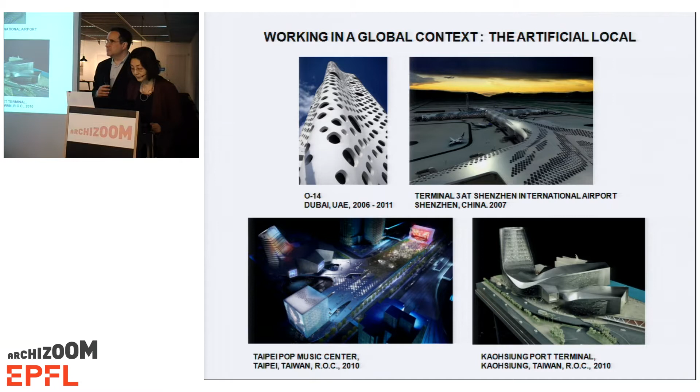Okay, I'll be talking about the first project, the O14 project, which was completed a little over a year ago. One of the things that pulls together the projects we're going to be talking about this evening, aside from at least 2 of them being competition projects, is the question of context in contemporary work. For better or worse, these projects deal with places that are quite remote from our office in New York, and therefore we're not talking about the normative or perhaps old-fashioned form of locality, but about another kind of emerging form, which I would say operates on a number of levels.

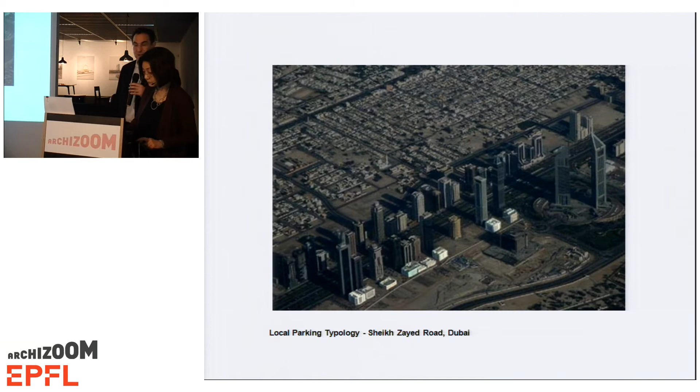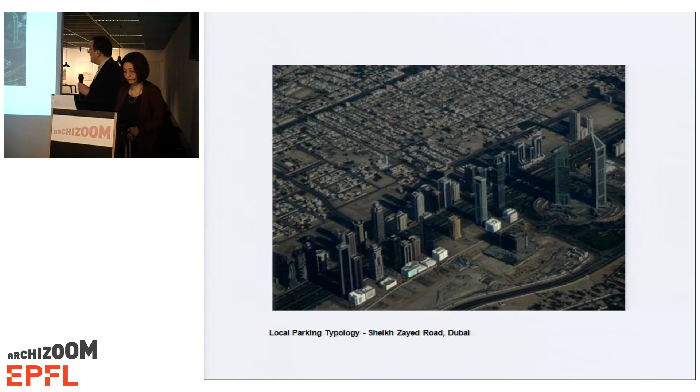The other aspect of this kind of urbanism was the almost delivery-package notion of tower and associated buildings like parking structures. This image of Sheikh Zayed Road, the central road in Dubai, shows a typical deployment of tower on the street frontage, in any kind of sub-postmodern style, while the back street would have a typical parking structure occupying the whole back area, making a dead street behind the main drag. That was the kind of norm developers and builders expected.

Then, of course, we were handed the design guidelines by Business Bay Development, generated by a British firm called Halcrow, a big multinational conglomerate, enforcing a kind of postmodern aesthetic on the development. They tried to mandate arcades at the base, some form of a middle, and a decorated top, suggesting how parking would be associated with the building.

So we worked very hard with the developer to rethink those guidelines. We had to work within them at one level, but also cleverly subvert them. The first question was the podium base. Instead of seeing it as a base, we looked toward more modernist antecedents—that base could actually be super-elevated, raised above the ground plane, opening up the ground plane and making available another kind of urban space at the top of the podium.

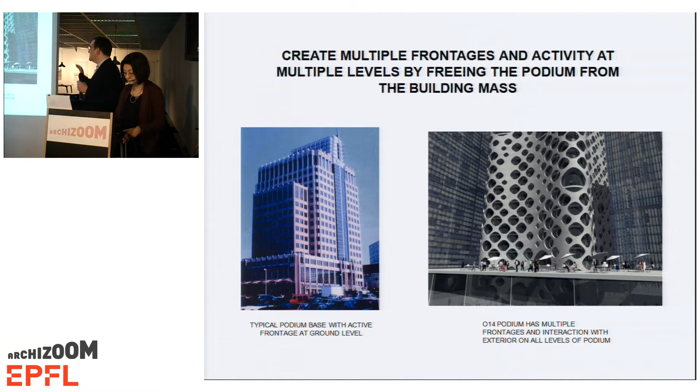This was something that for a short time was being developed by OMA for the master plan too. It was a short-lived association, but we thought it was a fantastic idea—you could have an active ground plane, and these mandated podia could be connected, developing another strata of life in the city. It's still there in the project, although sadly the other buildings basically wall it off. But it's part of the ideological dimension of the project, I'd say.

The idea of the arcade also had to be rethought. Our notion was not to make it an applied base, but to essentially provide the space for the arcade. It wouldn't be signaled by a base, but by a clearing away from the lobby space—one could enter it, but there wouldn't be a classical stratification of the tower like you'd find in a traditional arcade, yet it would still function as such.

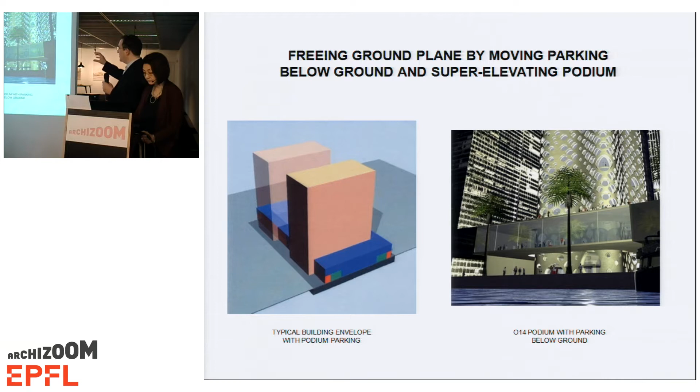And again, in super-elevating the base, we argued successfully with the developer that we could eliminate the parking typically placed there. Because it's on the water's edge, they could make a lot more money with commercial space or developed spaces inside that super-elevated podium rather than filling it with cars. So we successfully argued for below-ground parking in this scenario as well.

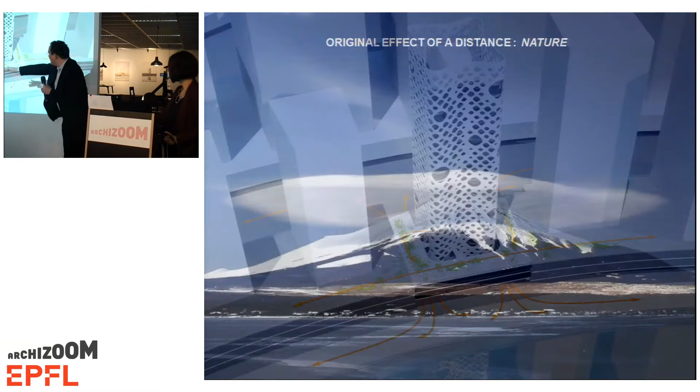So essentially, we're trying to open up both the ground plane—this is a waterfront esplanade—and make available this second level of inhabitation, which could theoretically be connected.

The other part of the project I want to open up here is what we're attempting to do with the effect of the architecture, which I mentioned obliquely earlier. I go back to some writings, specifically a work by Walter Benjamin that I'm sure you all know, called The Work of Art in the Age of Mechanical Reproduction. I was struck rereading it when he talked about...

...what the original notion of a place was—like a mountain, which he gave as an example—producing the effect of distance when you look at it. Original kinds of places not susceptible to reproduction produce a strange kind of effect, which he calls that of a distance. And I began to realize that those potentials typically associated with natural objects are suddenly possible to play around with in architecture now, given the new tools we have available.

We can produce a kind of second nature, I'd say, in terms of the appearance of the building, which produces an uncanny effect between the artificial and the natural. That's also a question of how one uses things like gradient fields in design, continuous variation, and so forth. You get these strange effects, which I'd say are more a question of management than of composition.

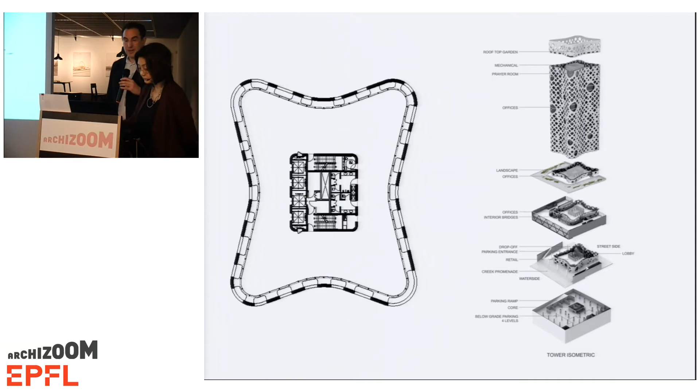So I'll advance now into the building. Quite simple—it's a 22-story project. There's an exoskeleton of concrete which does all of the vertical support and takes care as well of most of the lateral forces on the tower. Because this is a concrete exoskeleton, like a nuclear reactor shell, the core could actually be fairly lightweight, since almost all of the lateral forces were taken by this exoskeleton.

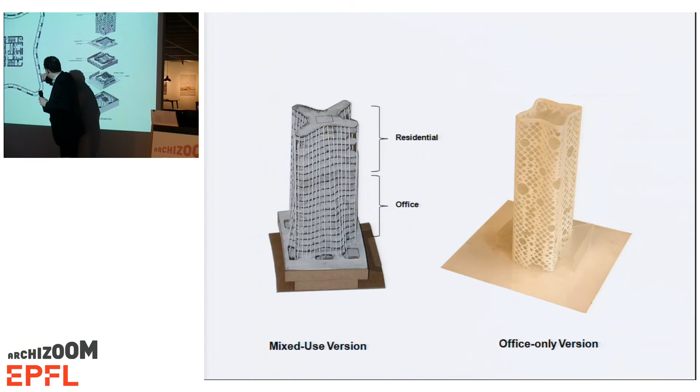And that exoskeleton is about one meter away from the slab edge. So there's a glazing line here, and what we call the tongues, which then connect to the shell. So there's a void space. The meter was based on a purely pragmatic consideration—that's enough space for a window washer to get in behind the shell to clean the glass.

And then there was also a measure of economy, because we didn't have to deal with the problematics of putting glazing into the holes, but could use a fairly standard window wall that would span from slab top to slab bottom. So it solved a number of problems, both technical and in terms of crafting this project, by separating the glazing. But there was an earlier set of iterations that were far more conventional, which I should just touch on.

Everything moved so quickly in Dubai in terms of the demands of the developer that the first iteration of the tower actually mixed residential and office. The working notion in this very early, more morphic model was to do a conventional column and slab structure with an applied curtain wall. The cruciform shape at the top would handle the residential, in this case a series of duplex apartments, and then the project would belly out and widen to accommodate the office space.

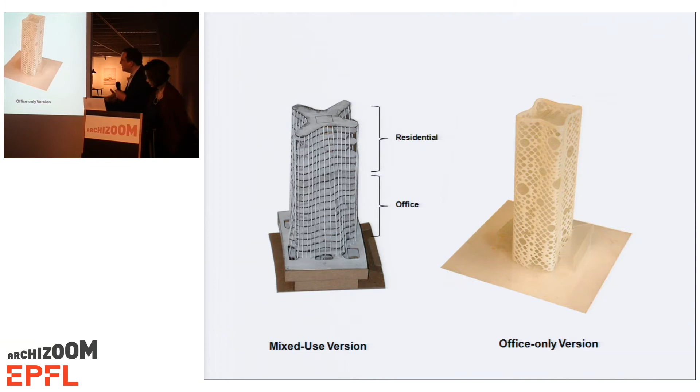In the event, it became all office space, and we had a kind of crisis in terms of the direction the design was taking, and then shifted to a completely different model, which was the exoskeleton project.

This sort of project is really an anti-frame model. There's a moment in a really wonderful essay by Colin Rowe called Chicago Frame, where he departs from the frame model and starts talking about this peculiar, really great project by Frank Lloyd Wright, called the St. Mark's Tower. Retrospectively, our project probably belongs more to this lineage.

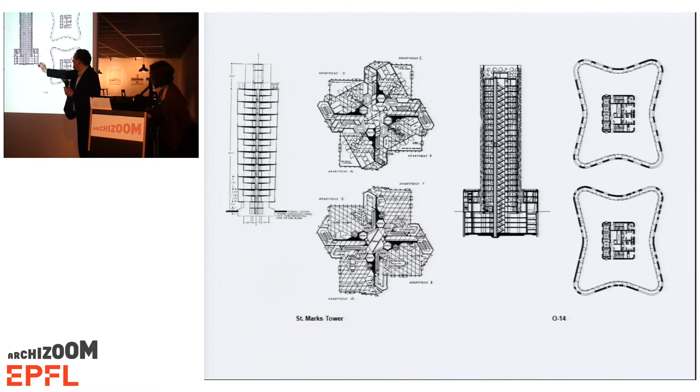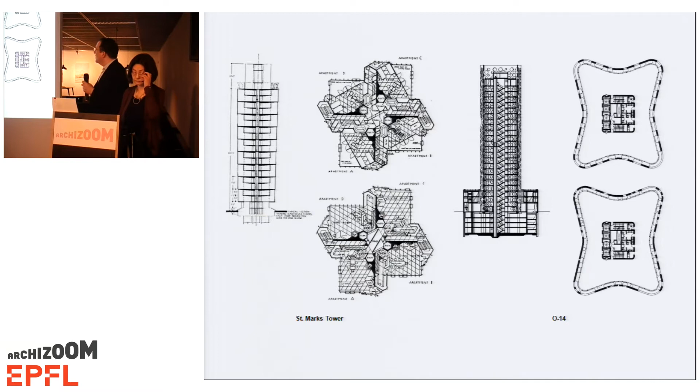In this case, the tree form of this project concentrates the structure towards the center, and then you get branching trays that come out of this central tree. In our case, it's almost the inverse — that tree has expanded to become the periphery, and then the slabs hang in and connect to the central core. But I think it belongs to that kind of lineage, away from the frame model and the older 19th century derivatives, or even the new versions of frame that you see in Dubai.

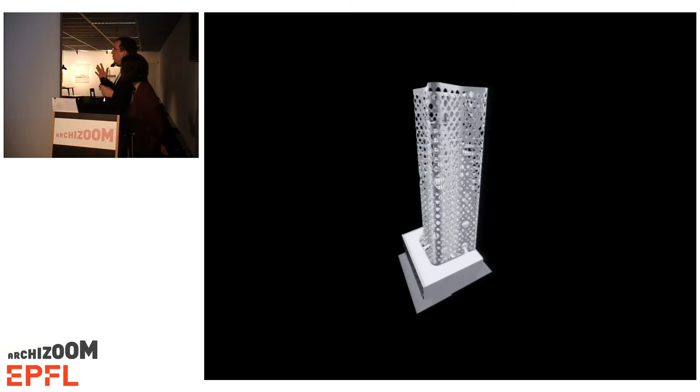So this notionally is what happened in the project: it starts with a column field, core, facade. That idea got pulled to the outside, and then the envelope becomes pockmarked with holes, which provide about 40% openness, more or less the same as one would find in the normative building, but with a very different distribution.

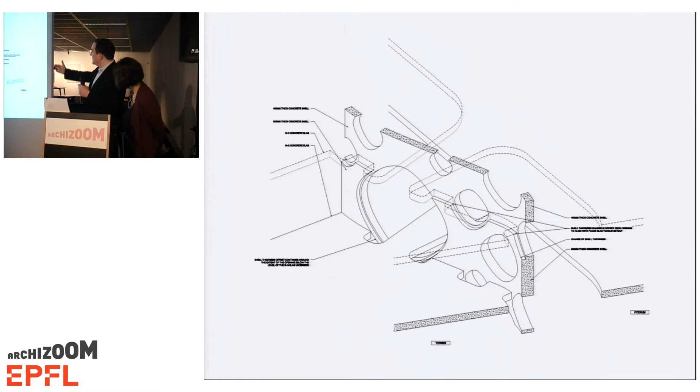As we developed the project, there was of course the necessity of how we would make connections from this podium structure, which was a two-story structure down below, in and through the tower. So we devised a series of bridges that connect to the podium, go through the holes, and then connect to the inner parts of the slab — but actually two separate buildings, structurally distinct.

The other thing that was really interesting at that moment in the project was that we went from a shell that tapered continuously to a hard change of scale of the shell. It went from 60 centimeters down at that podium level to 40. So we got an interesting detail in the holes in that transition zone.

Do you want to go back a second? So I would want to be honest about this. The next — yeah.

As a consequence of that separation, our mechanical engineer told us early on that we would be able to have a real benefit in terms of shading and cooling of the building. Of course, we knew that the shading would be highly effective, but we weren't aware until he pointed it out that you would get a chimney effect in that gap that would substantially lower the cooling costs of the building. Once we found that out, we worked to optimize that potential within the design.

That leads to a larger question about the issue of sustainability in relation to design, which has really been troubling me. It's very much on the minds of American architects. I'm not sure how it's being played in Switzerland, but I came to realize that if you're dealing with a body like LEED in America, where you have to meet certain numerical performance standards, and you look at the architecture that's actually winning these LEED awards, they're practically indifferent to the architectural expression.

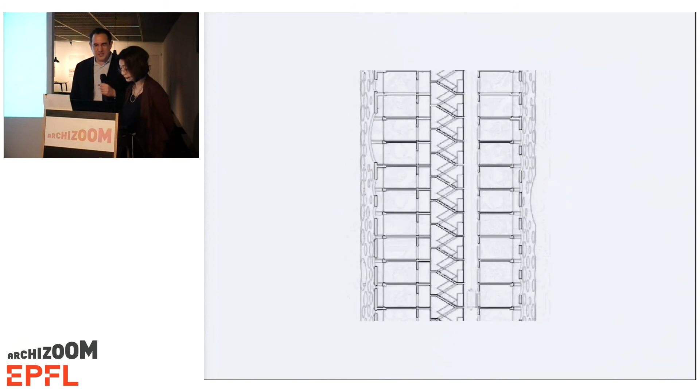And I'd also want to begin to talk about the specific aims behind the expression and the aesthetic of the building in relation to that idea of the artificial natural.

We realized that as the project developed, it got volumetrically relatively simple—just an extruded, kind of soft cruciform. I remember seeing these kinds of monolithic structures, like the Pyramid of Cestius in Rome, where you really don't have a clear idea of how big that monolithic form is, especially if the day is misty. It could look enormously huge, and then when you get up close to it, you realize it isn't all that big at all. That was a really interesting potential for the project, to deal with the monolithic.

And then on the other side, to deal with something that was highly figured, having excessive features like this toad, which basically has a kind of disruptive camouflage pattern on it.

So in thinking through the use of the diagrid, one of the things we were playing around with was trying not to be able to read the floor heights clearly. On the left is the more typical correlation between the crossing points of the diagrid and the floor slabs, where you'd get equally spaced connections. We deliberately scrambled that, making those patterns very much out of phase. A whole series of consequences flowed from that move, one of which is that it becomes very hard to read how tall the building is. You also get very asymmetrical connections to the outside, because the slabs connect to wherever they're solid.

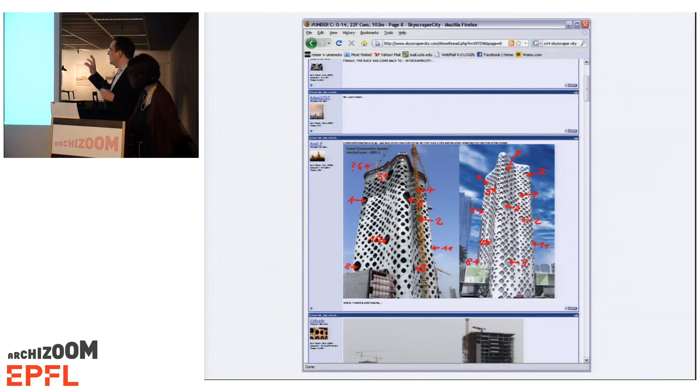So a very different kind of spatial effect when you go under and in between that skin, because it's possible to look up and see it. This was a kind of proof of concept—there are bloggers trying to correlate holes described in the early renderings and heights to ones that were in the actual building and construction.

We were again, through the iterative process, really trying to find a way of not reinforcing the load paths visually in the project, but to create a series of discontinuous zones of solid that would finally trickle down to what is actually a very regular column grid in the structure below. More or less the spacing of these solids, when this surface is peeled around, correlates to the regular grids in the parking structures. But we'd find a very devious way to bring the loads down in the pattern. This is an unfolded view of the geometry from the inside, and those horizontal dashes are connections to slab.

So there's an effect as a consequence of this move to irregularity. Contrasting this with a typical facade on 6th Avenue in Manhattan, where you have very clear perspectival diminution, which reflects back on the subject as a kind of sole owner of that view, versus the variable perspectives—the contractions and expansions produce a number of almost competing energies on the surface of the building when you look at it obliquely.

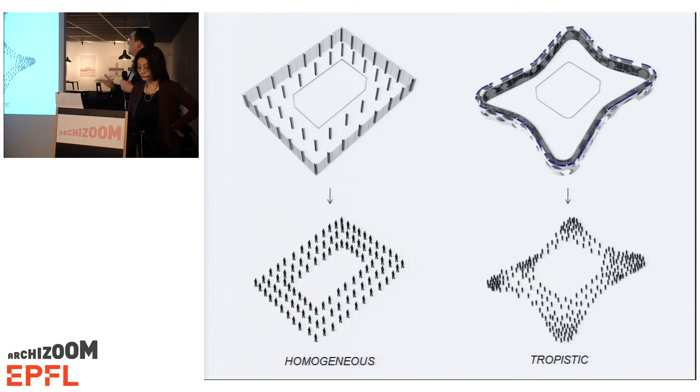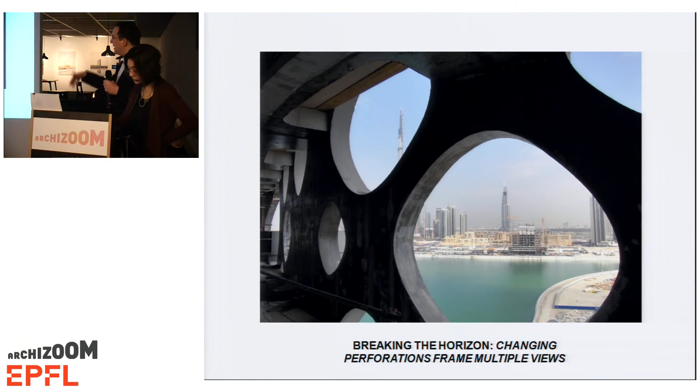That would be further enhanced by dealing with a non-uniform envelope rather than one that ordains the same homogeneous wrapper all the way around. So you get very strange and interesting views out, ones that, because the shell is some distance away from the edge of the wall, allow one to look up and down obliquely, as well as in the scan you'd find in the normative office building—a very different experience of the context optically.

And then pulling out, there was also a very interesting phenomena, which isn't just related to our project, but I think is part and parcel of the use of computation these days, where people are already pointing out that it's very hard to distinguish the renderings of a project from the built project.

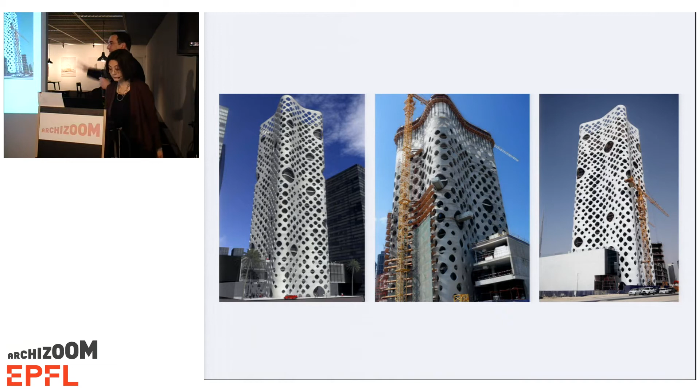And that was certainly true in the development of O-14, where you get the most material expression during construction. Once the building was finished, for a certain number of months, there was this incredible ideality of the surface, almost looking like the rendering. Now it's in the third phase with all of the aging and the desert dust, and it's starting to look more like a strange desert plant. But it's a very interesting kind of evolution, I would say.

It's an impersonal one. The other thing we began to explore in the genesis of the building was the issue of its materiality and its relationship to the geometry. On the left is an analysis done by Princeton students and the engineer Guy Nordenson for the Tall Building Show at the Museum of Modern Art, of the World Trade Center, the one that went down in 2001, by the engineer Les Robertson. He used something like 15 different alloys of steel strength.

In order, the color coding basically charts that. But in order to keep the facade totally regular, there were different force zones and then different strengths in order to maintain homogeneity. We realized that we were on the other end of the spectrum in regards to this. So what we were exploring really was an assumed extreme redundancy of structure, which gave us a lot of flexibility.

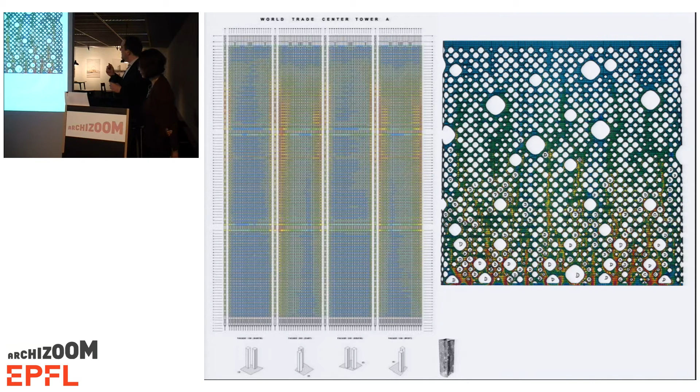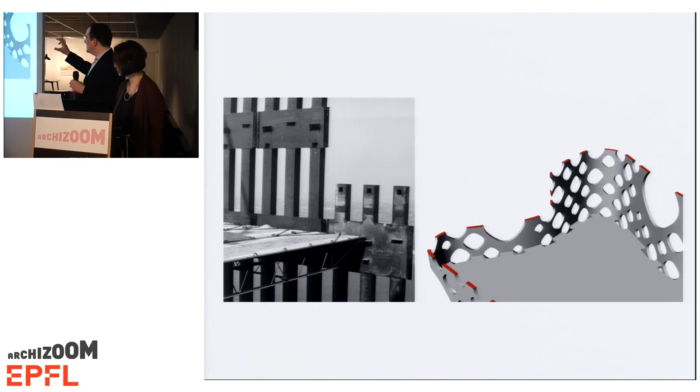So we went for the highest strength concrete and the reinforcements such that we could really gain a lot of flexibility in the way we could modulate the size of holes and their position. I think they're part of a connected spectrum. It's not totally different, but it's a different way of thinking through those relationships. So these are both tube structures, more or less, World Trade and ours. But one is quite regularized, and ours deals with regularity related to the irregular.

So I'm going to pass this to Nanako, who will talk about Shenzhen Airport.

I will talk about Shenzhen Airport for a short time. This Shenzhen Airport was definitely coming out of O-14 buildings. So we further developed the exoskeleton in horizontal forms. But also at the same time, the client asked us to design only the outer envelope, because the plan form and organization of the program was set and done by other architects.

So the challenge here was maintaining the outer diagonal grid consistent for the glazing, while manipulating the inner skin and reacting to the local zones, the program inside and outside, and the movement of sun and flow of people. It creates zones of difference within the field of the shell.

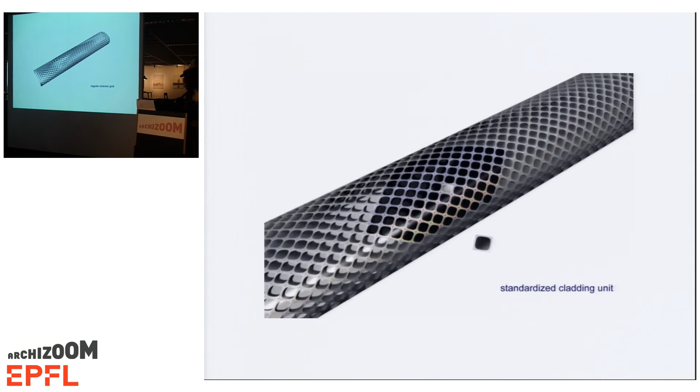So the outer cladding and glazing unit is exactly the same, and all of the change happens in the sectional projection of the hole. Also, near the gangway or some localized areas where there was a lot of people's activity, each opening reacts to the movement of people and the view of the outside.

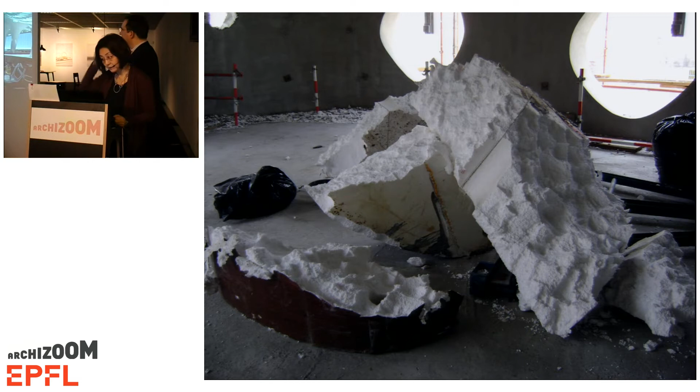And the departure hall was different because we changed the size of the hole, but also changed the angle of the hole. So we didn't need to keep the outer diagonal field consistent. In the case of O-14, we came up with a module system of openings because we thought it would be too expensive to make everything different. But at the end of the day, it was easier to make a new one for each one. It meant that we could have an infinite variation of holes.

Here is a construction shot early in the building showing the diagrid of reinforcement and a digitally cut foam for the void form for the fenestration. The shell changed thickness from 60 centimeters at the base to 40 centimeters at the top.

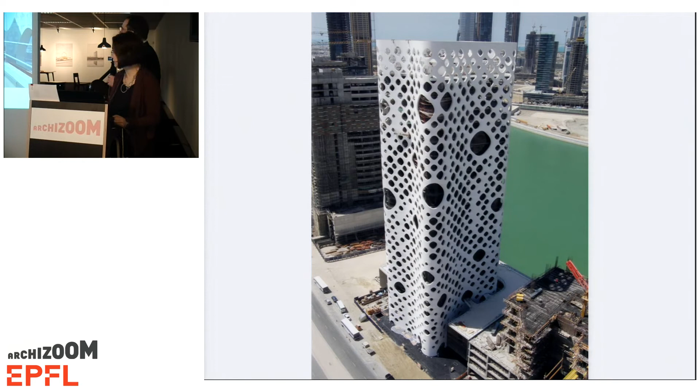So from the top view, the rooftop view, each hole frames a different view. An overall view of the whole building: the podium faces Dubai Creek and is connected to the tower with multiple bridges. The main entrance is from the roadside. The building gives a completely different relationship between the floor and openings compared with normal buildings, and the podium is connected to the building with multiple bridges.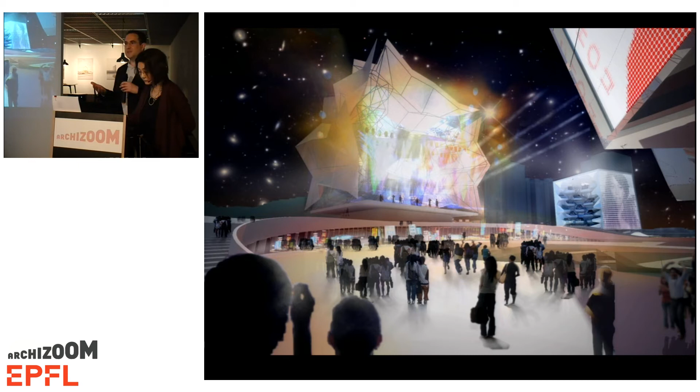So there were two, in a way, conflicting demands. One, to create a kind of physically embodied urban space that had to deal with not just the pop music industry, but with the fabric of the city and other uses and people. And on the other hand, again, a push to make an iconic project that would represent Taiwanese pop.

The site is presently a kind of derelict industrial area that they want to redevelop. They're going to be doing some large residential towers flanking the site, and the mandate of the competition was to somehow engage and join two really different site conditions: one, a super long and narrow site, and then across the Xinsheng road corridor, this wider site.

Most of the competitors decided to consolidate their building on the roughly square-shaped site, but we felt very strongly that this project was not just about a big building, that it had to engage the urbanism of this place, and that there would have to be an exploration not only of the buildings and their uses per se, but of creating what we called a kind of new ground for the project, to mix notions of landscape design, infrastructure, and architecture.

That meant really working intensively not only with a single surface, but dealing with the multiple levels in the city, to create an elevated, flexible park space that would engage this first iteration of the main hall. This is a rendering during the competition.

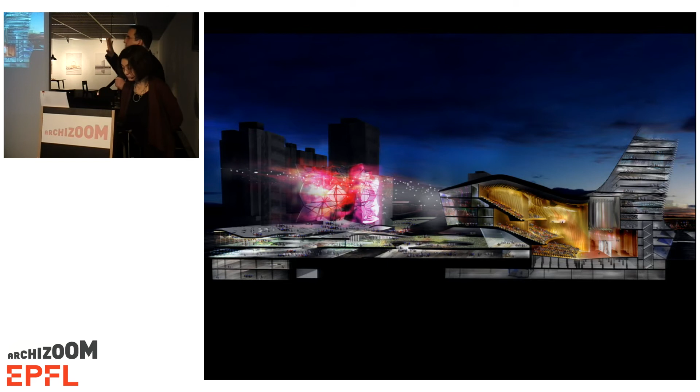So the idea here was that we weren't creating a center that would receive groups internationally like U2 — they would probably have such big crowds that they'd use a stadium — but this was more for a medium to large size group.

At that point in the competition, I believe the main hall was around 3,000 people, and then they asked for the provision for outdoor performance for close to 11,000 people, so a kind of big bridging structure.

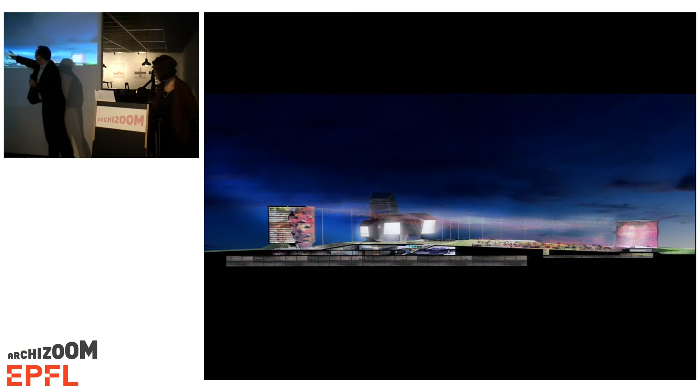The main components are this stage, which is actually a mobile stage, what we call the robot; the main hall that you saw the section of earlier; and then the Hall of Fame space, which was basically conceived of as a kind of vertical museum space with seating carved out of the face of the cube. That seating would actually start engaging this stage, and I'll show you that in a second.

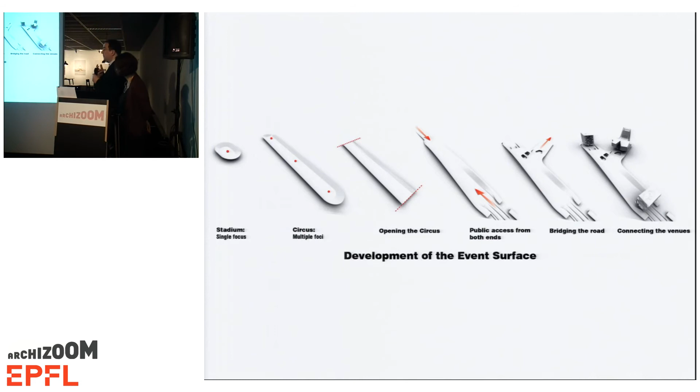The urbanistic concept really was that we're dealing with a set of very old models that we would, in a sense, mutate. A stadium notionally has a single focus. If you turn the stadium into a circus, there are multiple foci, multiple places of interest. But the problem of both the stadium and the circus is that they're quite circumscribed.

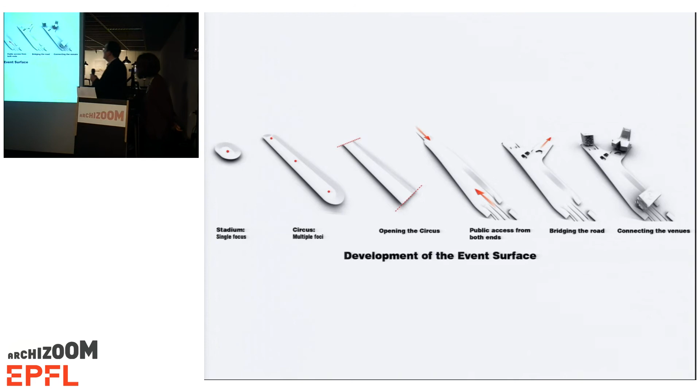They don't really connect to their context. So our idea was to basically take the circus model, sort of an elevation of a very old Roman model, create public access from both ends, and then further branch that model to have it cross over the road dividing the two sites, and then place these three major object buildings on the site.

This is the animation showing notionally how the project of the surface developed first, and then the components on the surface.

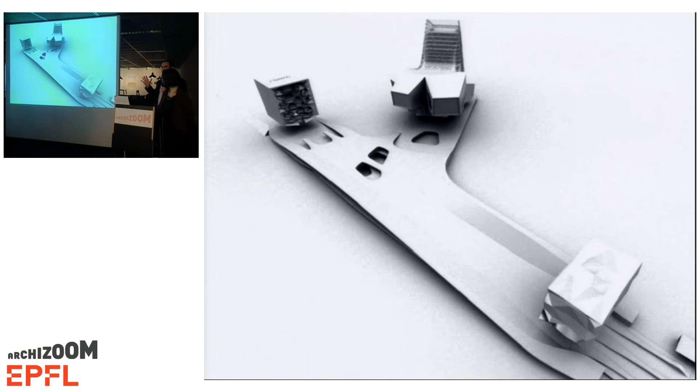I'd also want to talk about this relative to recent history. Its closest antecedent in a way is the Yokohama Port Terminal by FOA, but increasingly in dialogue with people of my generation, beginning to realize that this sort of single surface or topological project is not adequate, and that an interesting way of engaging created ground and object buildings is possible. So it's part of that legacy, a kind of common legacy, recent exploration.

As I mentioned before, the building had to be kind of telegenic, I would say, be an icon.

The question of its iconicity was also something we were exploring, in a very different way than, say, OMA. Rather than a kind of fixed icon like Taipei 101, and there's a newscaster who's ageless in the United States, you probably don't know, named Bob Costas, who's sort of the human equivalent of Taipei 101 — rather than that, the Madonna model seemed really interesting, that she's always the same but always different. So how to deal with something that's the same, maybe geometrically, but mutable in terms of how you deal with media and change, was a really important issue.

Especially because it's a place that has a constant turnover of acts and events, both related to pop and not.

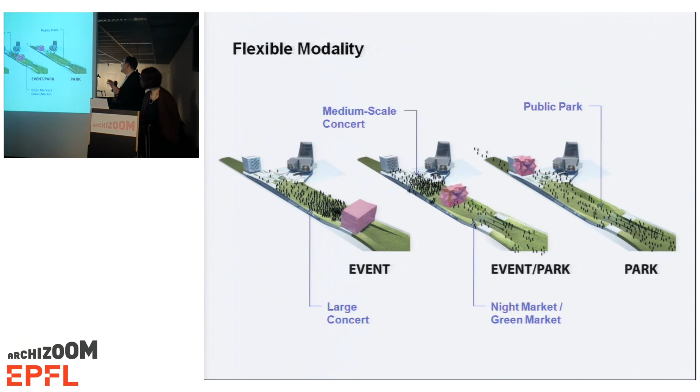And finally, in the most compressed form, when this stage is actually kissing this cube where there's seating, this becomes an entirely open public park without payment.

So the idea was to have a flexible urban model rather than a fixed one, with varying degrees of openness or closedness depending on the scale of the venue, or the demand for night markets or other civic functions unrelated to pop music.

So this is one of the very early renderings showing the outdoor performance space with a lighting net above, and then this in another modality when it's essentially an open public park.

And this view shows that moment when the stage actually kisses the cube, so you could have very intimate, small-scale performances.

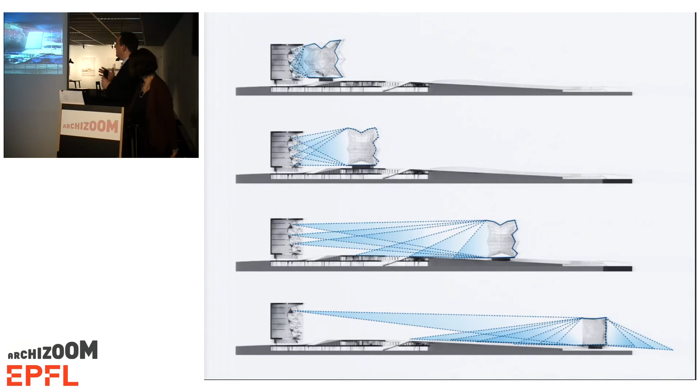And then a view out of that cube towards the site, at a different time. So there was always a desire to deal with this notion that one would have to host multiple events and scales in this place to keep it active on a 24-hour basis, and to see what is possible given the proximity of this changing stage.

The main hall, as I mentioned, is really a kind of hybrid building. The fly tower is super exaggerated to become the office space for the music industry, so artists have direct access to producers back of house, and there's a completely different universe happening front of house for the general public and their interaction with the artists.

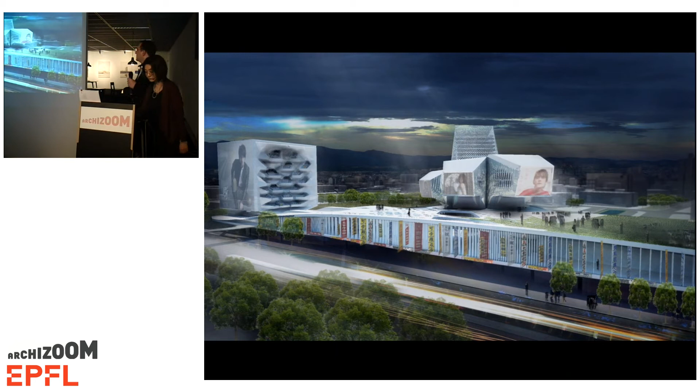And this is a sliver space. So it was a matter of creating not just a single surface anymore, but really a thickened ground, so that commercial space would occupy both the street level and that sandwich as well — a kind of mix.

Now the project has changed, and it's changed again. There were issues about the noise code, so this is one of the iterations where we developed an acoustical shell that basically covered the outdoor space, but again tried to keep the connections urbanistically under the shed when there wasn't a concert being staged.

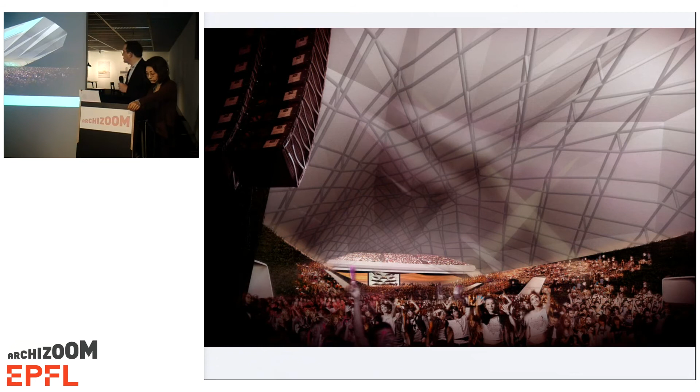So doors would come down and basically seal the project during a performance, and then it became a kind of open, all-weather shed when not.

And then this is yet another development. This is the most recent, so it's more or less a sketch. The pop music industry demanded a major increase of program for the main hall, and eliminated an earlier demand for a Broadway musical type of stage, just in case they didn't get enough acts. So the project for the main hall has changed considerably, and offices have moved across the street. This is a very tentative sketch of where we are now in redeveloping the project.

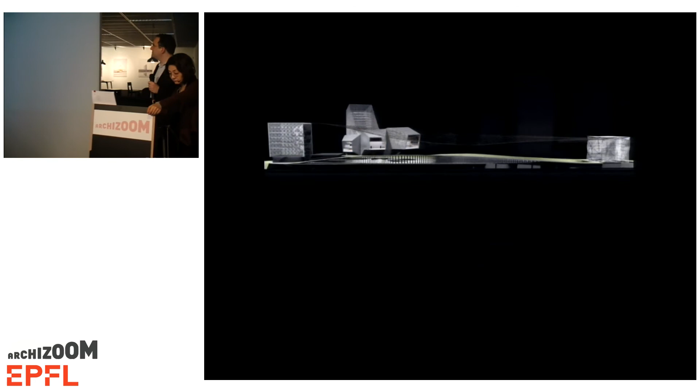But let's move now to the animation that we showed in competition. And then Nanako will end the presentation with our latest Kaohsiung project.

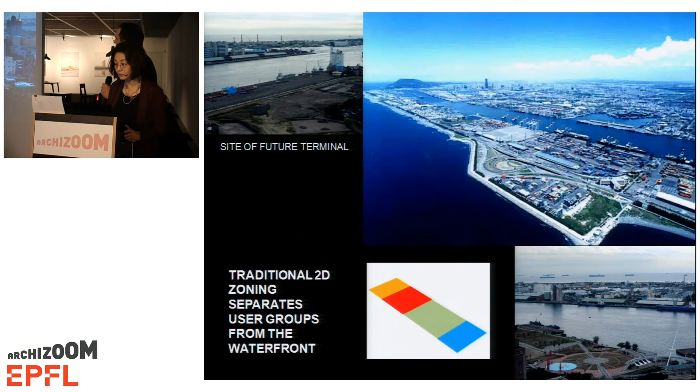The container port of Kaohsiung is one of the largest in East Asia and the largest in Taiwan. Kaohsiung is also one of the largest industrial centers in Taiwan. However, recently industry has given way to post-industrial use, and so the port is being revamped for the public.

The site was designed as a former industrial dock. It suffered from the segmentation of public uses like many other cities. The waterfront is cut off from the public by 2D monofunctional planning.

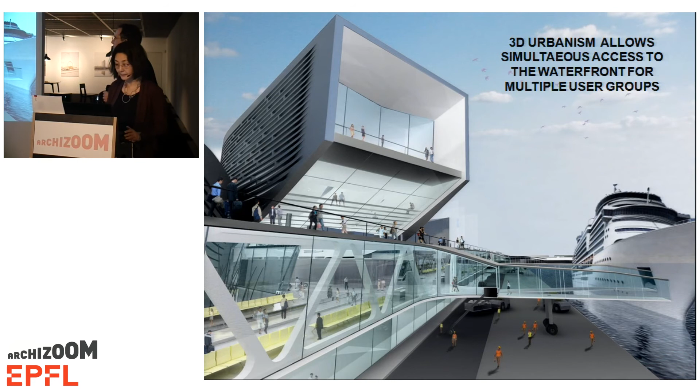Our schematic concept brings these different issues together, all necessary uses, segmenting them in sections - sandwiched with terminal use in the middle, public above, and service below. There's connection from the departure and arrival to the gangway to the ship, service function on the ground level, and public on top of the podium.

At the scale of the port terminal building, these surfaces stack up in sections, allowing the public terminal and service function to work simultaneously.

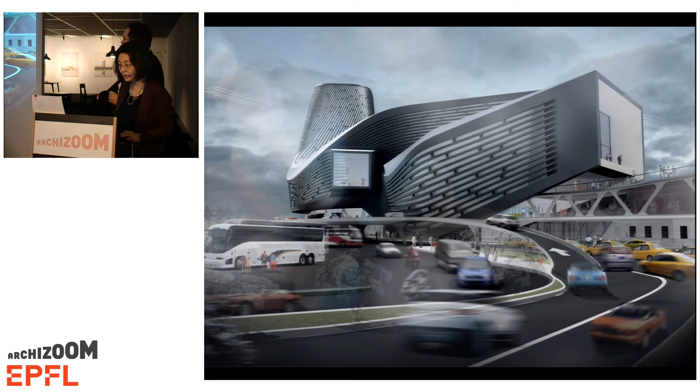The view from the land side shows the departure entrance to the port terminal, the vehicular drop-off for cars, taxis and buses. The ground level is the arrival hall, accommodating the taxi queues, bus stop, and entrance to the underground parking lot.

The view of the public boardwalk which connects to the waterfront - this boardwalk is supposed to continue and create a water edge park in the future.

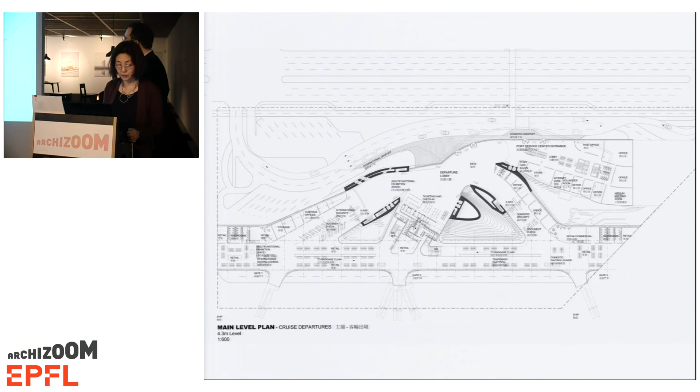The main level at 4.3 meters is the departure hall, allowing direct access on level to the waiting area and boarding ramps. The platform is shaped like a manifold, branching from one central space to each of the functional lobes.

The G3 level of the terminal intersects with the public waterfront boardwalk. This elevated pedestrian boardwalk hits the top of the terminal lobes, creating a zone of commercial uses such as restaurants and shops. These levels are accessed through escalators in a poche space of the wall.

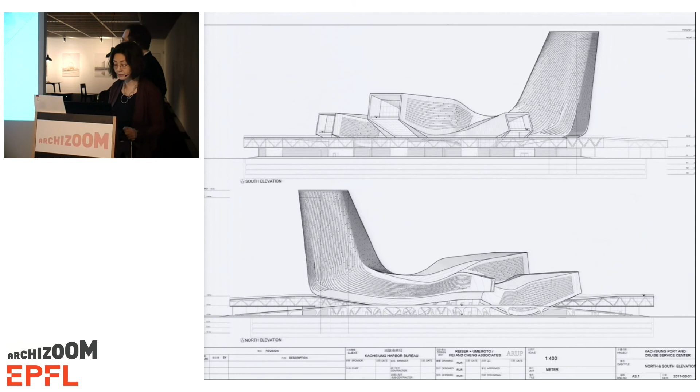All vertical movement systems happen within the walls, keeping the main volume free.

The slide shows the entrance from the waterfront and the entrance from the land side. The office tower's relationship to the public space is 13.5 meters to the top of the podium.

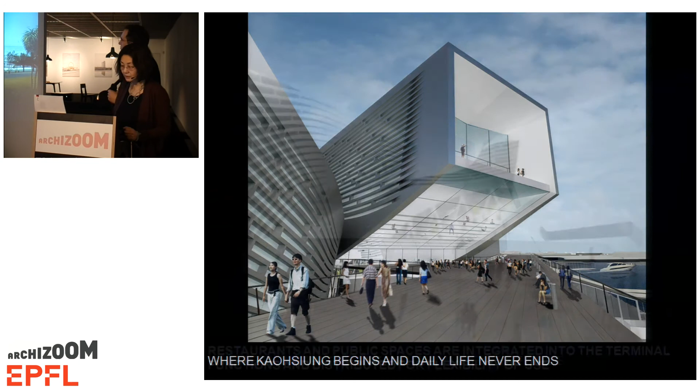The view of the main row and connection to the boardwalk, and the view from one of the row restaurants, where one can look at activity inside.

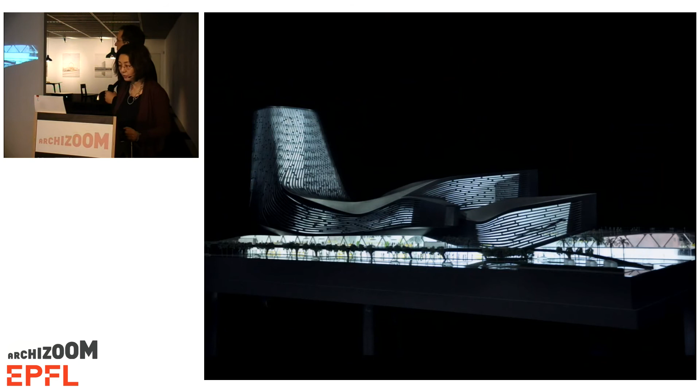The fenestration is important not only to bring light into the building, but to project light out. This is especially important for the building at the water edge. We are designing the dynamic lighting system now.

The issue with the podium of the terminal space is that when the ship is not there, the terminal is dead space. The Kaohsiung Port Terminal offers a public space that stays always active even when the ship is not there. Usually these ocean liners come once every two weeks, so when the ship is not there, nobody is around.

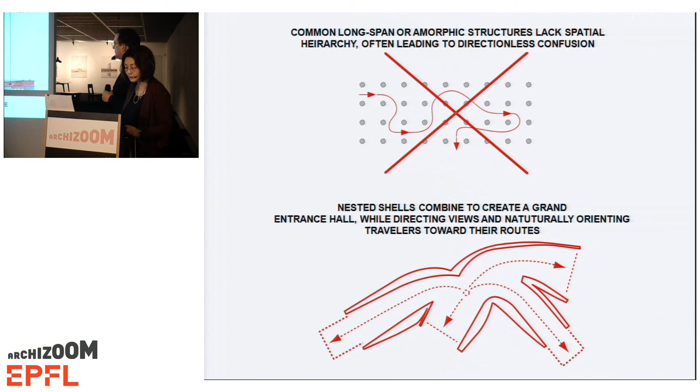The space is not a conventional open column field, but changes direction towards the gate.

That simplified section shows that for the departing passenger, they stay on the level, but they can also see the function of the boardwalk above - so if they have time, they can use those amenities.

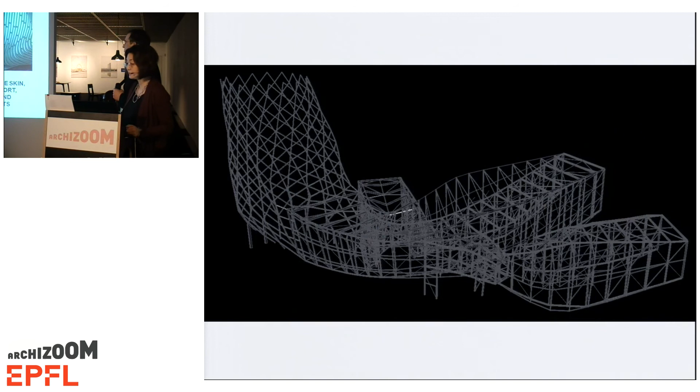The double skin houses the circulation, the mechanical systems, and the structural system. It also creates airflow for cooling the building.

The branching, cantilevering lobes and the diagonal structure for the tower.

On the land side, the volumes are part of a continuous system which engages the edge of the boardwalk and connects back to the waterfront, linking to the further waterfront park. The long view from the harbor explores the iconic possibility of the building.